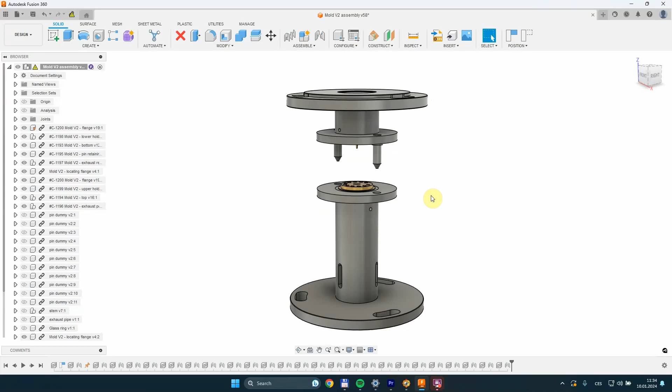So the goal for today's video will be to fabricate the mold. We'll be making the upper part, the lower part, and attaching them to the lathe to find whether they can get synchronized and precisely aligned together. We will skip the inserts, the mold inserts, and leave them for the next video. So these brass parts will not be made today.

First we have this flange that will be mounted to the faceplate of the lathe. This is the registering edge that will precisely position it. Then we have this part that will hold the brass part with all the holes for the pins. And finally, a flange here that will hold the locating pins.

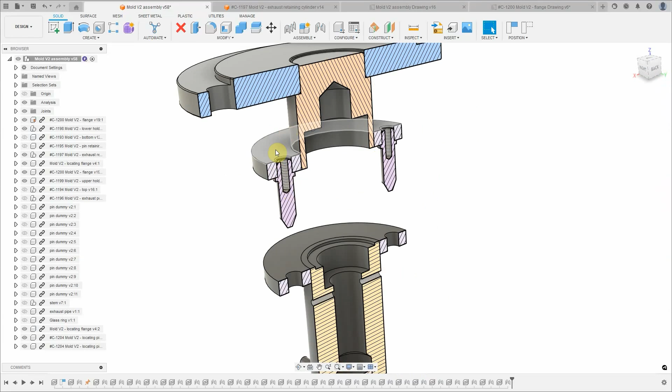I made some changes here from the last video. There were a couple of comments from you - thank you again for them - suggesting to change the way how the two flanges were mating together and use locating pins instead of the weird things that I designed in the previous video. This is a standard solution for injection molded dies, and we can use it here in our mold as well.

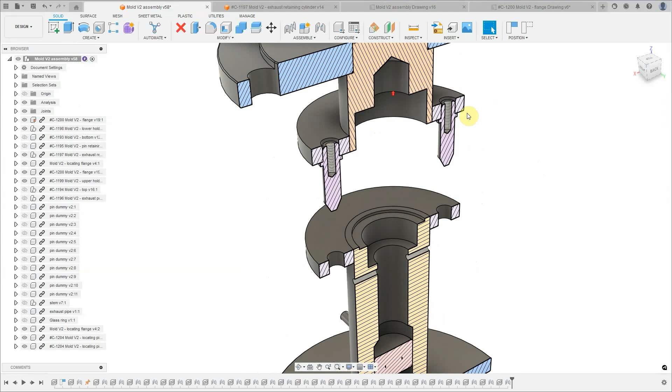Now the bottom section - it's the same flange here, flange with holes for the locating pins here, and here we have a hole for the second part of the brass die, which is here, and finally a movable part that will help us eject the finished stem after the forming.

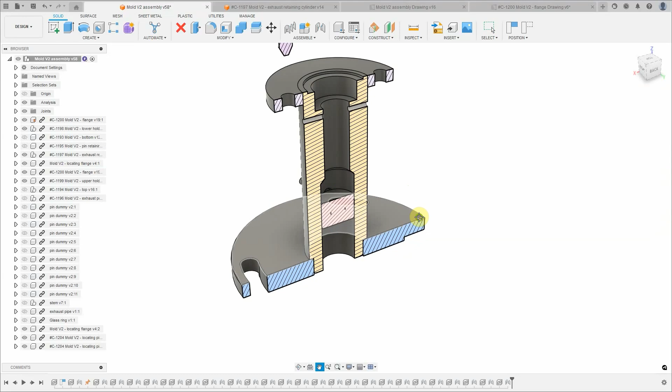And the interesting part here is how to connect the parts between themselves. We have different joints here. So for instance, this one between the flange and the shaft here - this is a permanent connection - while here the pins need to be sliding in the holes. They need to be sliding here because we will be inserting them by hand into the holes, and so on.

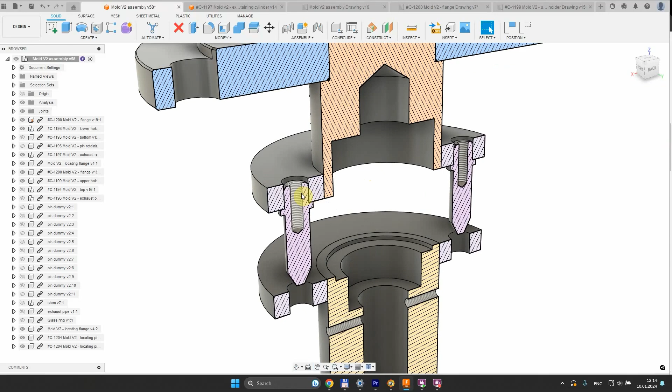So let's start with this connection here. We want to press it on a press so that it stays together permanently, which means that the internal part needs to be slightly bigger than the hole, and the slightly is actually standardized.

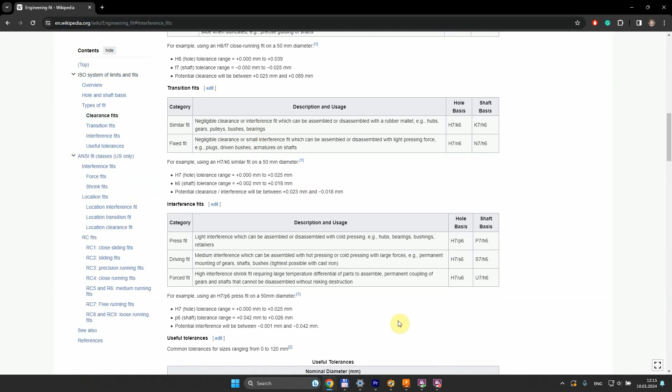The way how the parts come together is called engineering fit, and I will not go into details on this one. There is a great video on YouTube by Quinn from Blondihacks explaining everything about fits and tolerances. It's an absolutely perfect video, and I recommend checking it out if you don't know what I'm talking about here.

So for this connection I chose a fit that's called press fit. It's a light interference which can be assembled or disassembled with cold pressing - hubs, bearings, bushings, retainers. And the tolerance zones here are H7, P6. So H7 is for the hole and P6 is for the shaft.

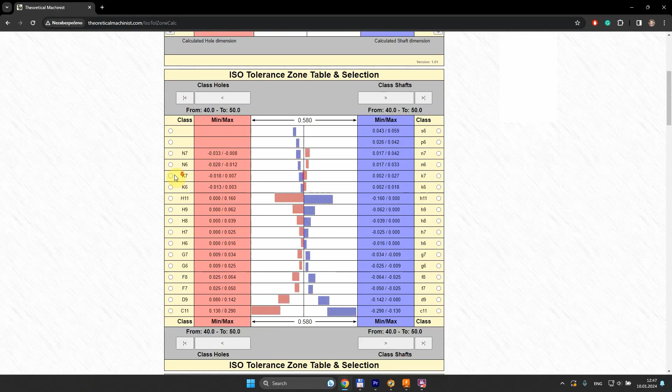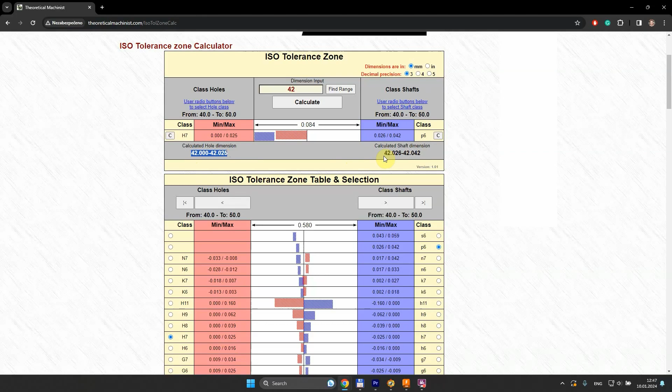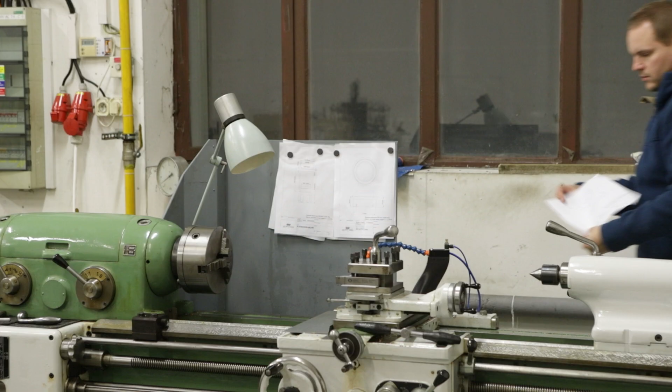And we have a new baby that will help us with this task. I still haven't told you that we got a new big lathe, and because it was really big we didn't have space for it at the castle, so we had to rent a little factory building for it.

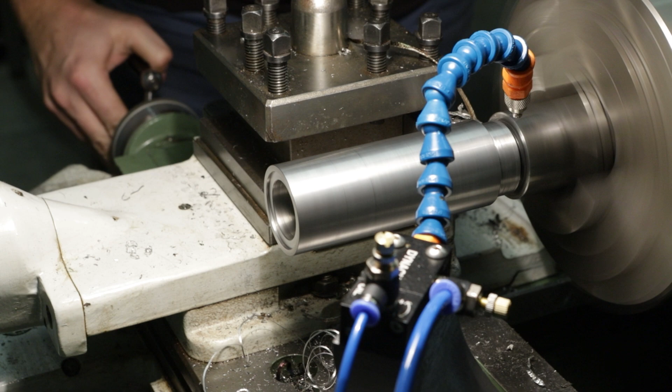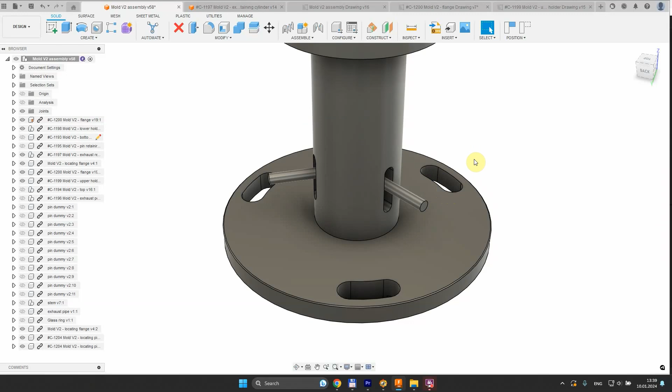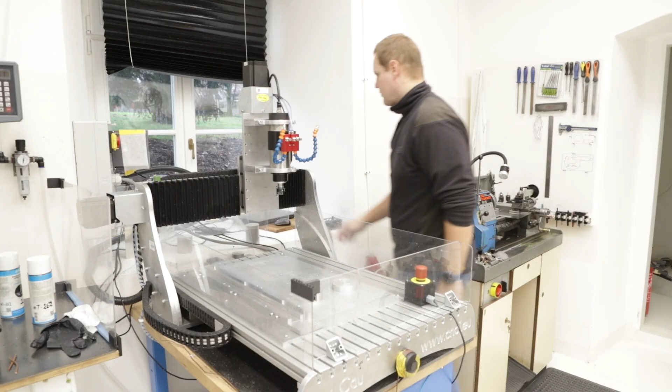So the flanges and the shaft of the lower holder were finished, and before pressing them together we had to cut these slots. The purpose of the slots is to fine position them on the faceplates of the chucks. I never thought of using our CNC router for cutting steel until I saw this video by Breaking Taps. We have a different machine, but it was worth trying the parameters displayed in that video, and I found that it actually can cut the steel.

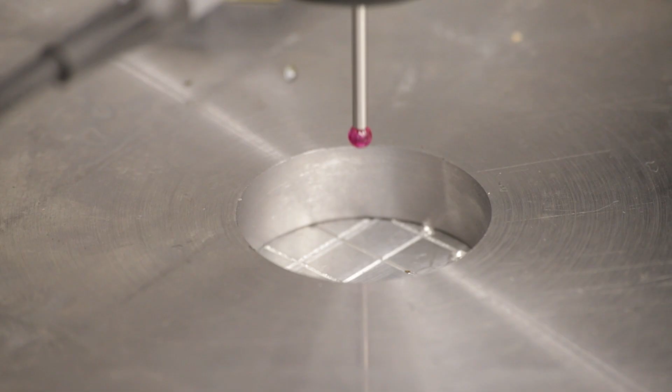We just need to run the machine a lot slower, and also we need to use a lower depth of cut. The machine probably doesn't like this, especially the bearings in the spindle, but it does the job, and from time to time I think we can simplify our life by abusing it a little bit.

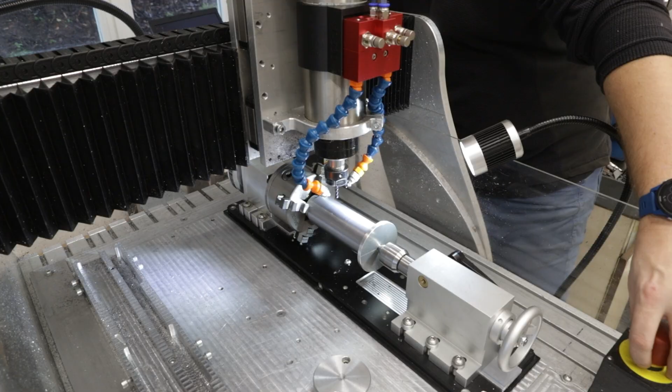Machining of the steel and pressing the components together turned out beautifully, so we could continue with our CNC router, and I programmed it to cut the slots for the ejector pins. For this operation we used a 4th axis and the same cutting speeds and feeds, and also this time there were no complications.

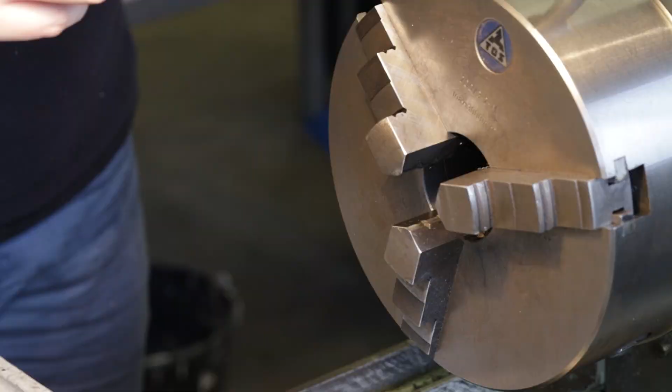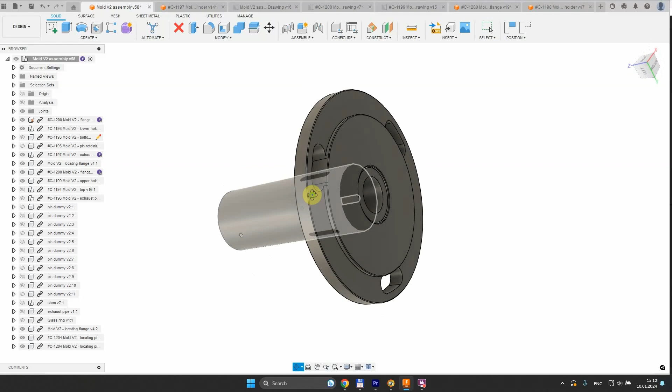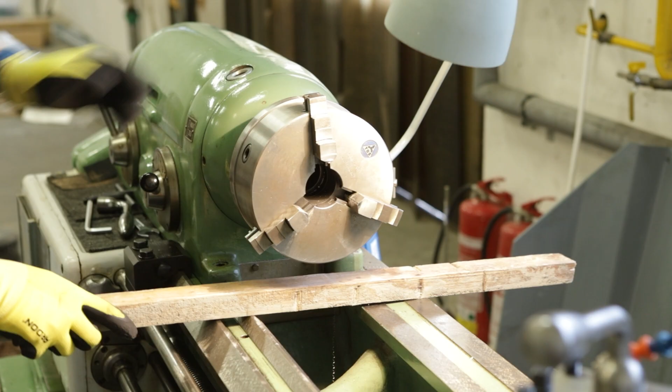Now it was the right time to machine this edge, which will accurately position the mold holder in the chuck of the lathe. To make sure that this part is as perpendicular as possible to the faceplate of the lathe, it was necessary to wait until we have these two parts connected together, and then the plan was to machine this edge while holding this part between the centers in the lathe.

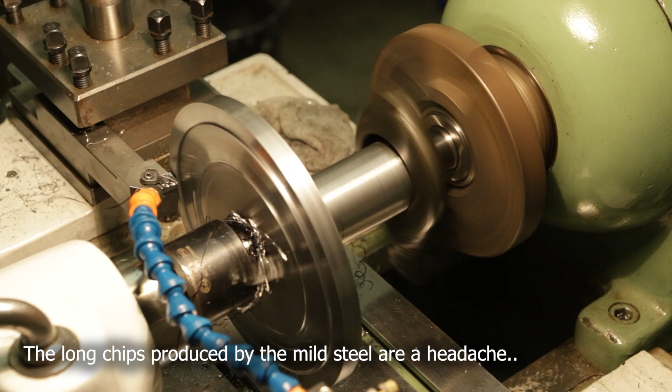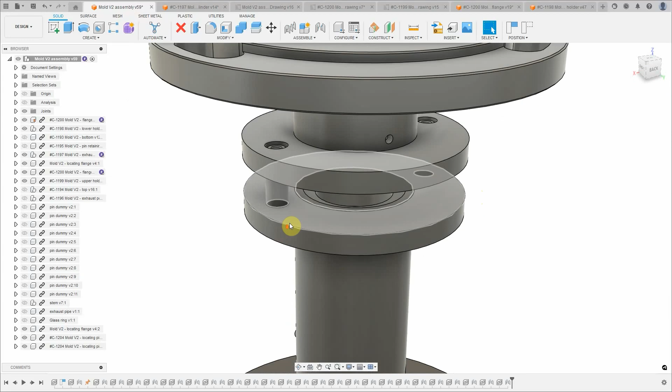The next task was to machine these two flanges. Their purpose is to hold the locating pins that align the molds together. They take care to have the molds, the upper and lower section, aligned.

And also here we need to decide on the fits. So the connection of the flange to the body of the holder will be done here with a press fit, like in the first case. And here we will use a sliding fit.

The definition of the sliding fit: minimal clearance for high accuracy requirements, which can be easily assembled and will turn and slide freely, e.g. for guiding of shafts, sliding gears, crankshaft journals. Anything more accurate would be hard to machine, and also because we will have temperature changes here, it could get completely stuck during the work, so we will stay with the sliding fit.

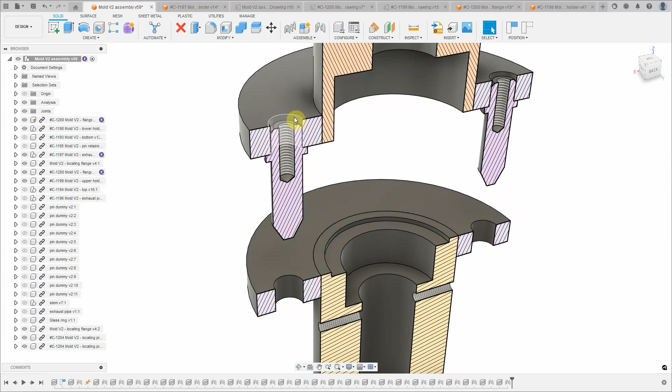So the tolerance zones here are H7, G6. The H7 will be for the hole, and we will make it with the reamer, and the pin will be turned to G6. Practically, for the hole we will be within this range, and for the shaft, for the pin, we will need to turn it to this diameter.

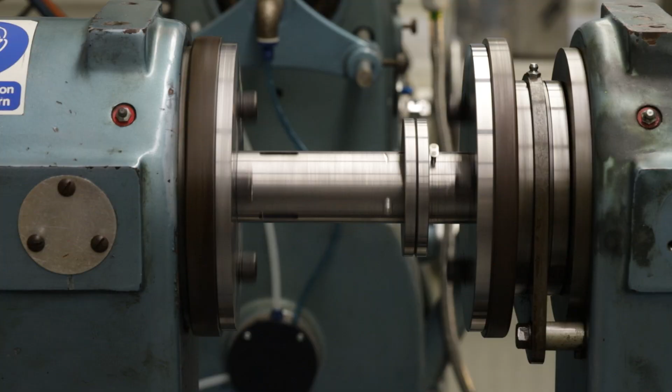So the holders are finished, mounted, and I can see some movement here, which is not good, but maybe it will be acceptable.

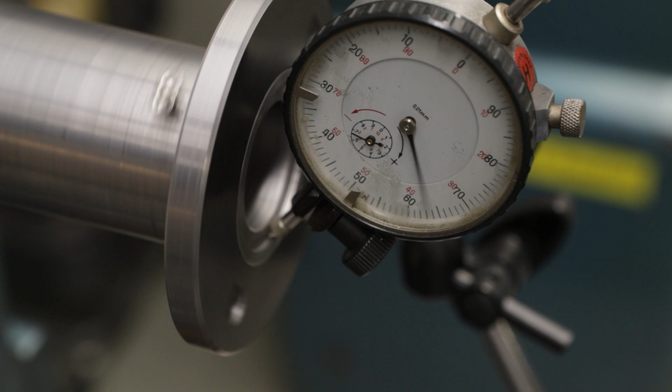So the runout on the face is some four hundredths. Some 0.2 of a millimeter runout is in the seat inside, so that's quite a lot. Around seven hundredths on the face of the other side of the mold holder, and inside of this seat we have over 0.2 of a millimeter runout.

So I mounted here the locating pin. The purpose of the pin is to precisely locate the two halves of the mold together. The pin itself and the hole are machined precisely with very little clearance between them. But because the two halves are not very precisely located, we will see if the pin can get into the hole and synchronize the two molds together.

There is some play in the heads, in the chucks, but we will see if this is enough. And I also have to adjust this.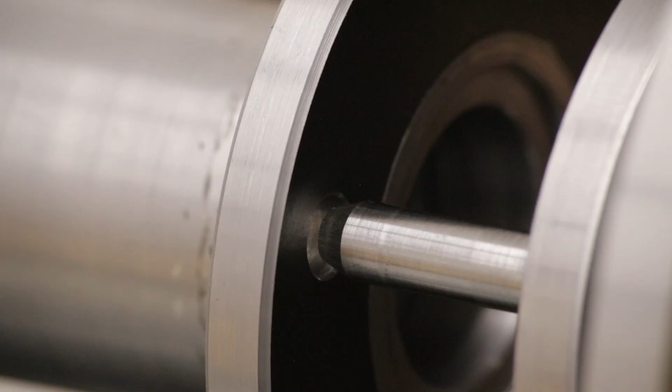Now we have both sides synchronized with these slots. I move it a little bit and now I can turn on the machine and see how smooth it runs and how smooth it goes together.

I don't know if you see it, but when I put it together, the whole right side starts moving. So probably not the best for the machine, but for us, for a couple of prototypes, it could work.